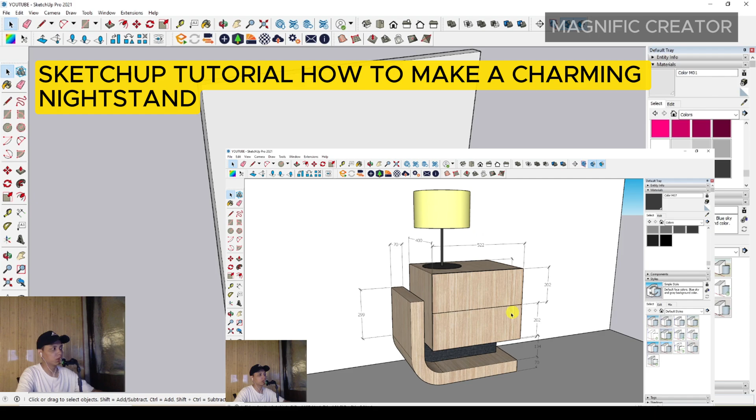First of all, we have to make a basic shape in the wall with a rectangle. You can set any size, or a size proportional to a nightstand.

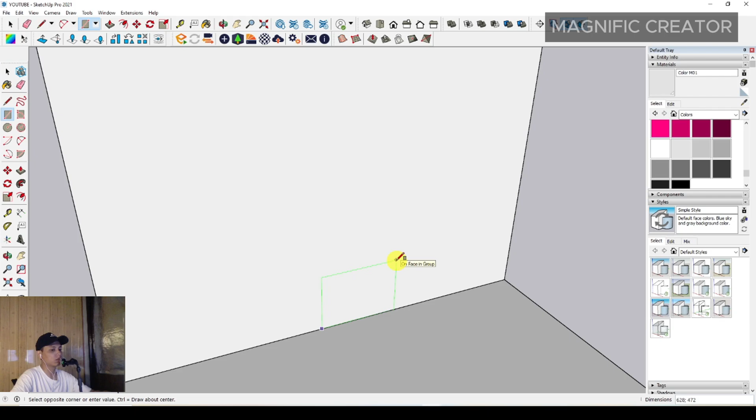You can set this around 600 by 400 millimeters, and then make a 2-point arc to make a curve right here. Then you have to double click.

After that, you can select this line and offset it. You can offset inside around 100 millimeters, or maybe set a bit less, okay, 70 millimeters only.

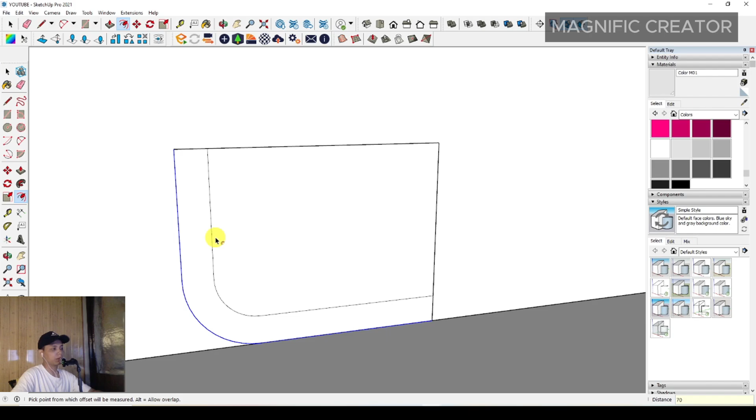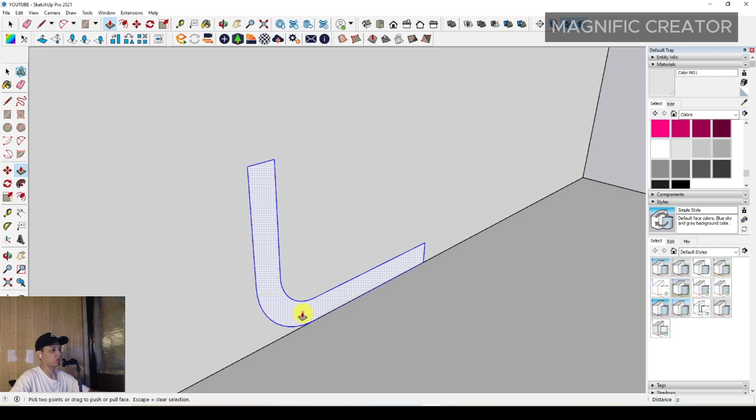Then you can delete some unnecessary lines by clicking the line, right click and erase, and click this line, right click and erase. So this plane is left over there, and then we have to push it to the front around 400 millimeters. You can see it, and we just make it a group.

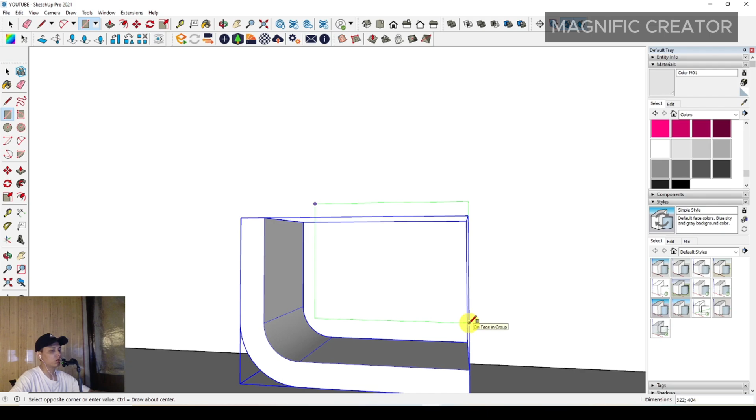Then we can make the rectangle for the nightstand here with a size maybe around 400 and 500 millimeters, and then push it to the front like this.

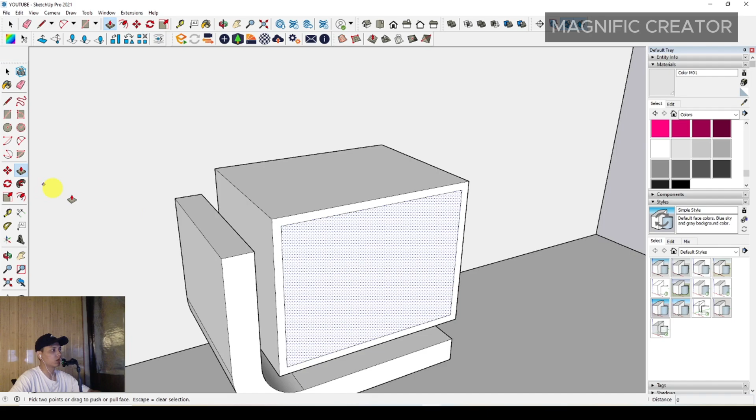Then we can offset it, around 20 millimeters only, and push it to the back around 550 millimeters. Sorry, we can just offset it around 350 millimeters, and make it a group.

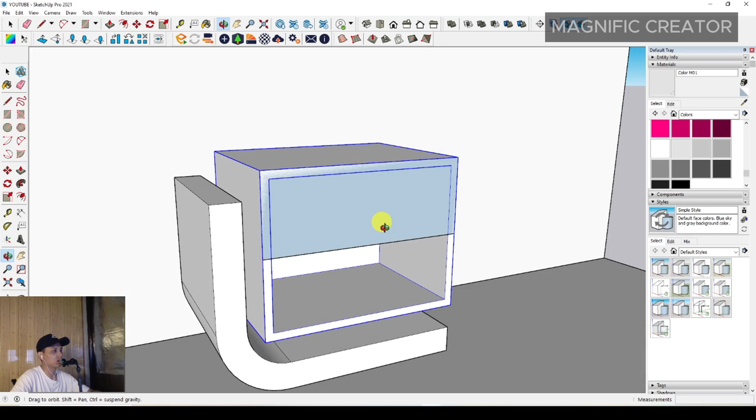After that we can make the drawer. We can make the drawer by using this tool, and then move to the front just a little bit.

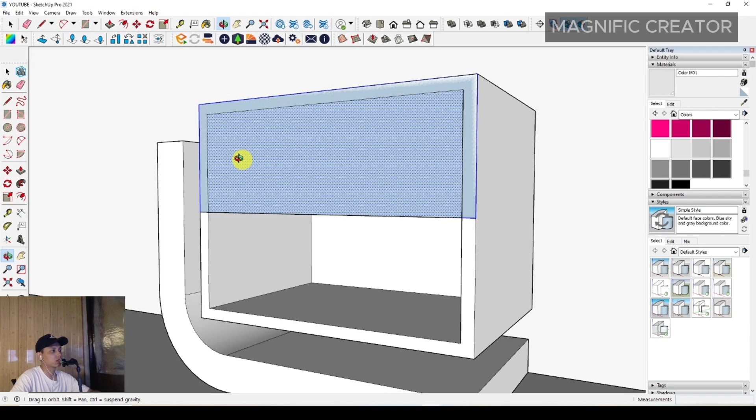We can make the line first right here, then push it to the back, and complete the object. We can move it to the front, and we have to make a thickness for this door handle, maybe around 12 millimeters, and adjust it also.

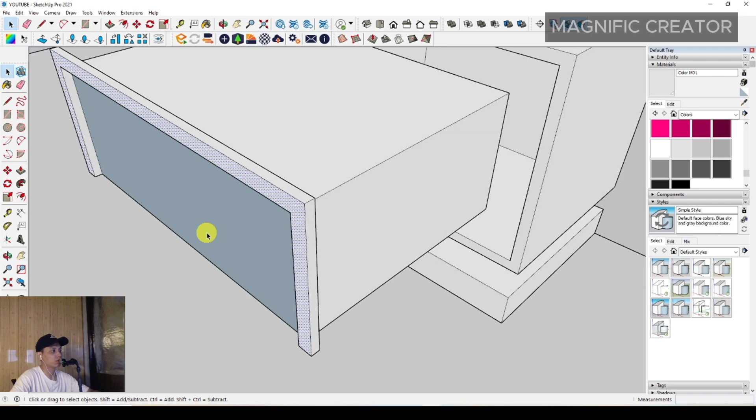Then we have to offset this drawer around 15 millimeters, and push it down around 140 millimeters only. Okay, that's all. Then we can erase some unnecessary lines right here, and make it a group.

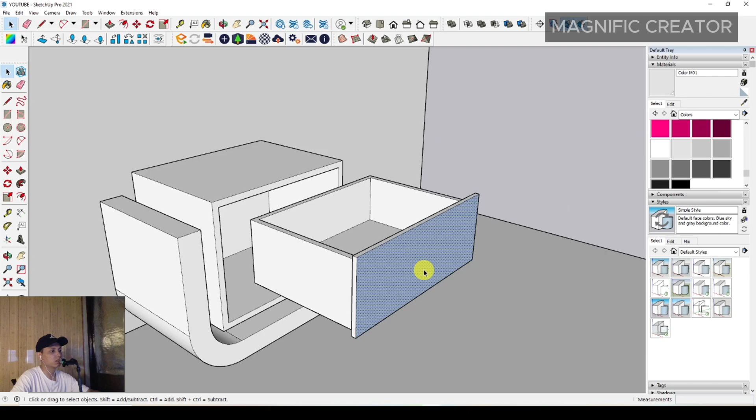Then we can assign a material for it first, and move it into the back again. Then we can make it a component and create it, then select move, select control to duplicate it.

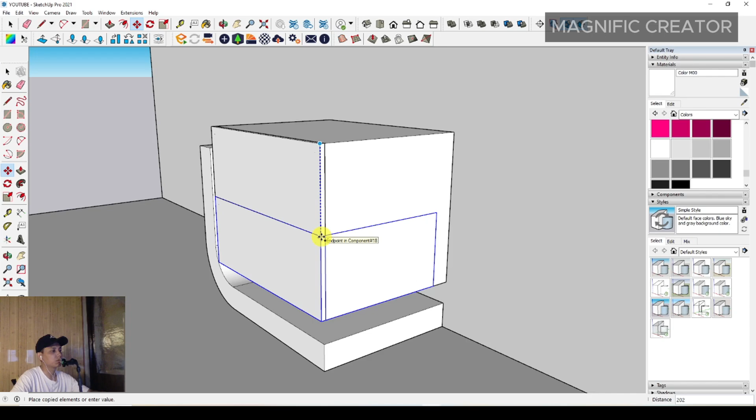And press position on the bottom of the nightstand. After that we have to make support in this area.

We can use this rectangle to make support, and push it down, then just make it a group.

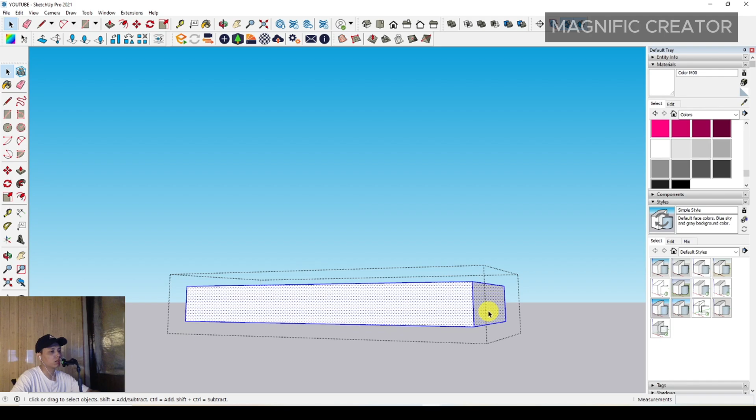Then we can push it a little bit to the left side, and if you feel it's higher than before, you can select this object and move it up, maybe around 70 millimeters, and then push it up to make the space over there, so it looks more functional.

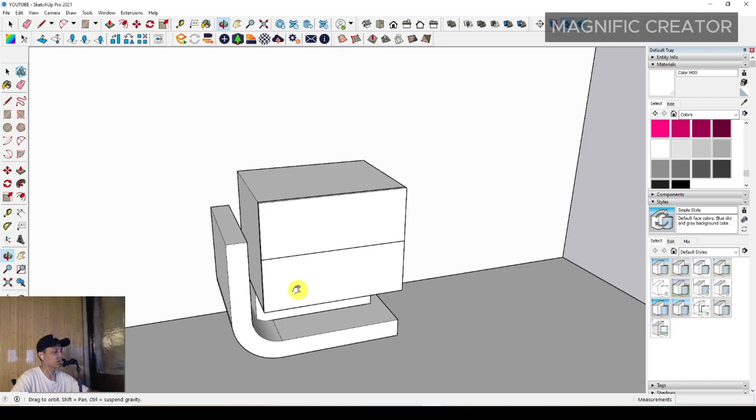Then you can assign material with synthetic surface. You can use formica laminate dark over there. You can assign it all over the nightstand, and then set a different material on the support, and that's it.

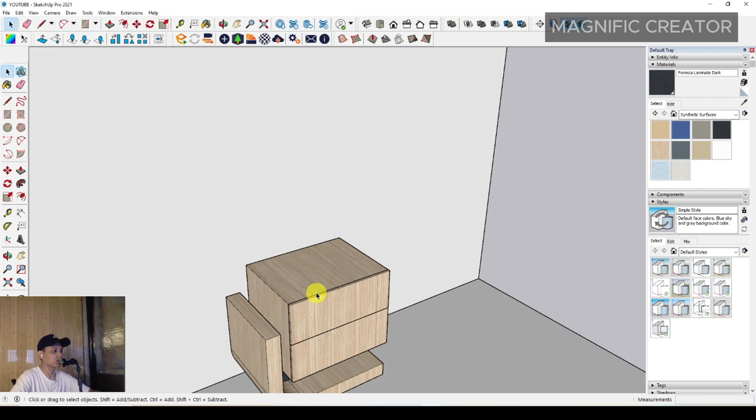After that you can make some simple lighting right over there.

You can just make this simple lighting with a circle, and then position it in another space, and use a circle.

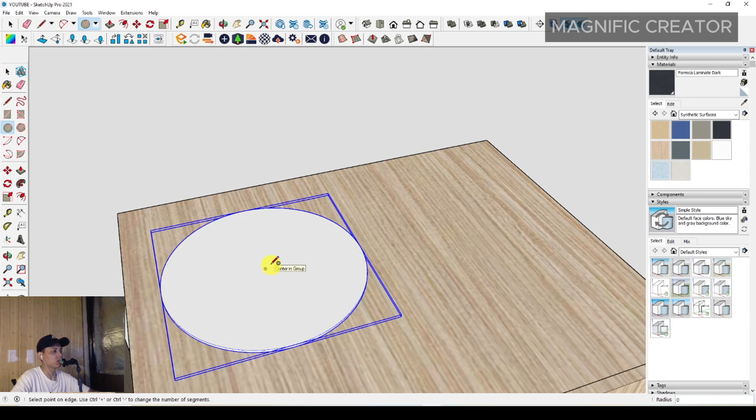Then you can make a cylinder for the lamp support, and make it a group. Then you have to draw again, draw a circle again to make the cover of the lamp, and set the smoothness of the circle by typing 100 and pressing enter.

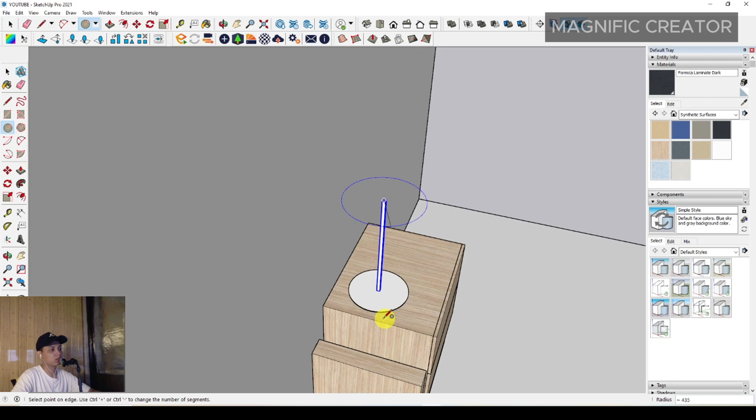Then you can get the lamp. Okay, then you can offset it just a little bit inside and erase it, and then push it down. Push it down and make it a group, and that's it.

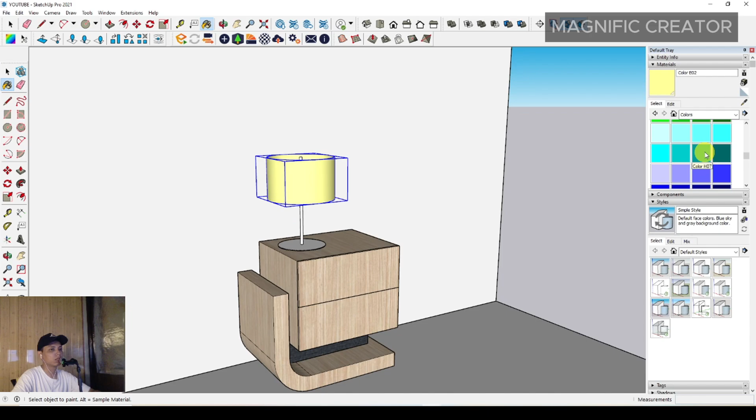You can get the representative nightstand over there. Then you can set the color of the lamp, and set the material of the lamp support on this area.

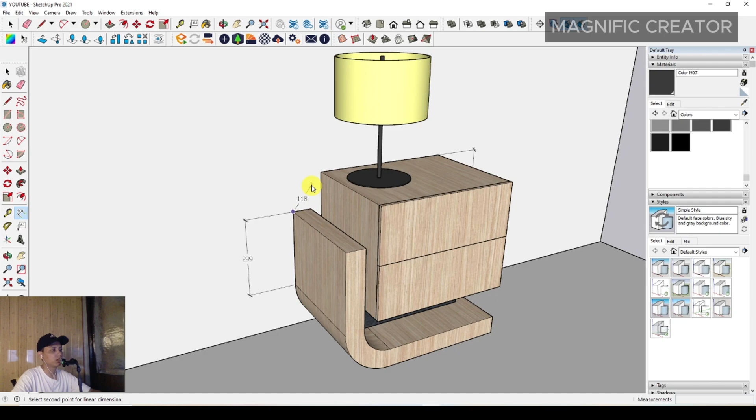Anyway, you can set the dimension to make it more clear for working, for example just a simple dimension, to make it easy to work with.

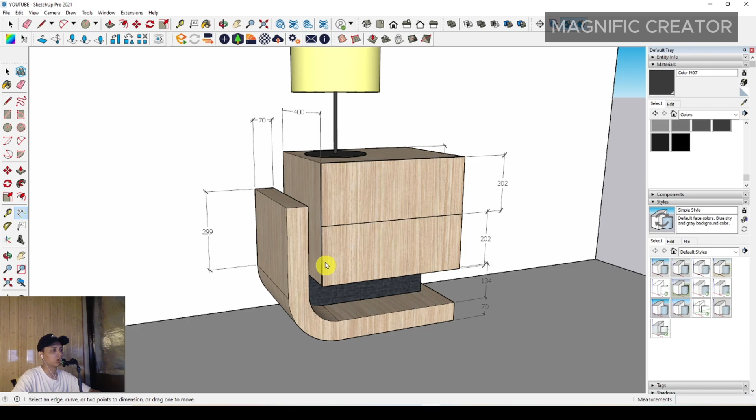Okay, just make a dimension over there. I think that's enough. It will help you a lot to make a charming nightstand. Then wait for my next video.